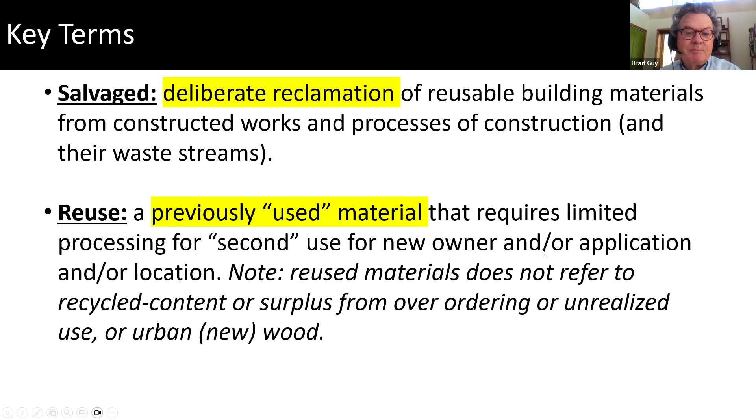Our project is for over 5 years, so we have plenty of time to work on a lot of the methodological and difficult, potentially decision-making issues that we have, although we have a good start on it.

Underpinning all of this is building the reuse capacity to serve the industry going forward. So after the end of the grant, we have capacity to provide environmental product declarations to the reuse industry, and I'll talk more about that.

The other three main parts are the tasks to create a product category rule for reclaimed building products, to develop nationally EPDs for reuse firms and NGOs around the US, and to create a digital EPD generator, and I'll again talk more about that.

You can see over the years we're trying to work in enough time to really be thoughtful about these processes and make sure there's good involvement, inputs, we work out the bugs and so on, and really take advantage of this opportunity to make this all well-grounded and well-founded for future success.

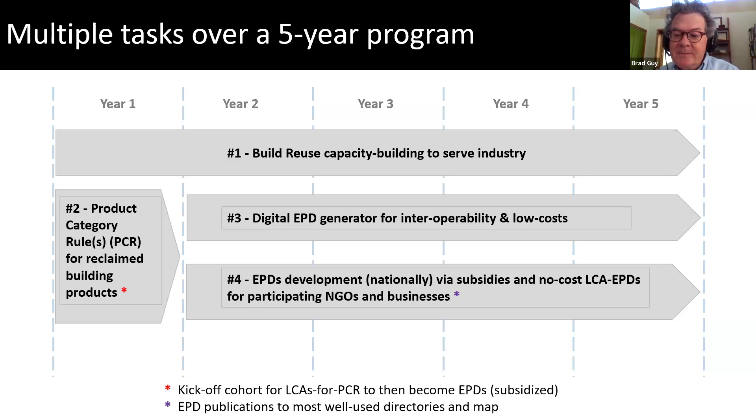I want to really highlight this industry. To this date, we've been able to track about 1,868 establishments. This is not including creative reuse, so-called art supplies and elements like that, or household goods or antique goods. This is actual building material reuse. It does not mean that one of these entities may not carry some of these other products, however, their primary focus is on building materials.

We're currently estimating about 20,000 jobs, 2.6 billion in annual revenues, and this is all generating $1 billion in wages. This is only 1.3 million tons of materials being diverted, which is less than 1% of the demolition debris generated in the United States annually. So I hope you can imagine there's a lot of room to grow.

The type 2 economic impact, meaning the actual full impacts throughout communities including the direct spend, the indirect spend, and the induced spending, is roughly at least 3.5 times. So annual revenues, almost $10 billion, $3.5 billion in local wages. So the real fundamental goal of this program is to grow these numbers.

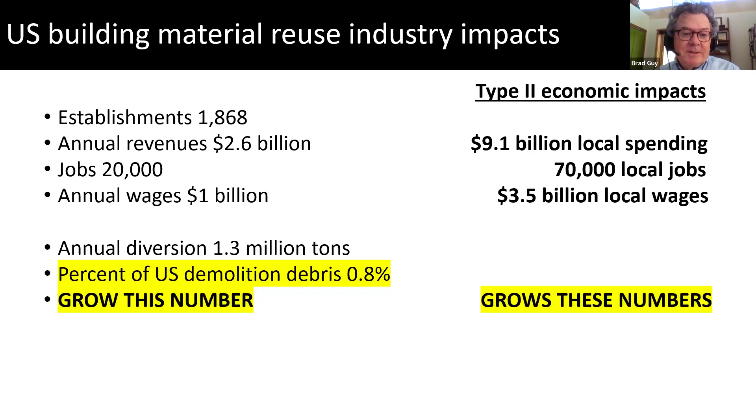Reuse establishments are in every state in the United States. Of course, they might tend or trend towards certain areas. There's a lot of interlocking factors that contribute to the success of deconstruction and reuse in the market. These can include policies, tipping fees, cost of labor, and the availability of land. These are all important factors.

For our project, we are looking at where reuse is happening and trying to be fundamentally representative of the regionality of reuse establishments. You can see the West Coast, it's kind of an obvious target. The Great Lakes, and there's a lot of that because of the historic nature of the US, the Southeast, Texas and Colorado, you can at least see for the moment where a lot of reuse is happening.

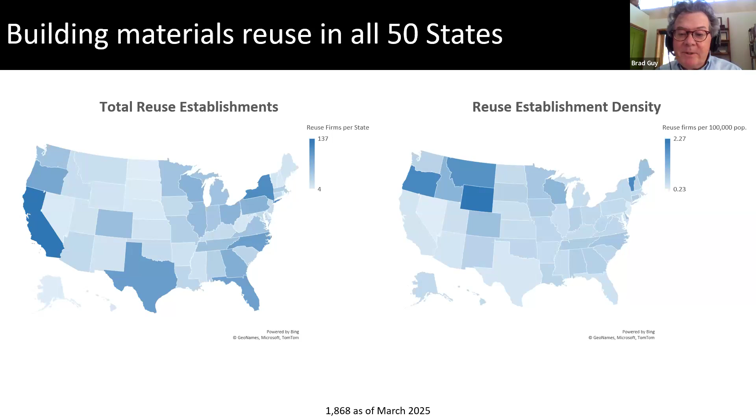Historically, the industry has been for-profit and nonprofit, almost 50-50, and that's really been, I would say, the grace of the industry is that it really cares. At the same time, the nonprofit sector is not known for being well-funded and supported, and it provides a lot to society without potentially being recognized and understood.

I've actually seen now that the for-profit sector is increasing in the industry. About 70% of all these entities deal in mixed materials, so the focus of our EPDs are proportionate to these sorts of material-specific divides around, say, mixed material facilities that might carry a variety of materials. About 25% of the industry is focused exclusively on reclaimed lumber, about 3% on reclaimed brick, and then you can see these smaller numbers, 1% in different sectors that are very, very niche.

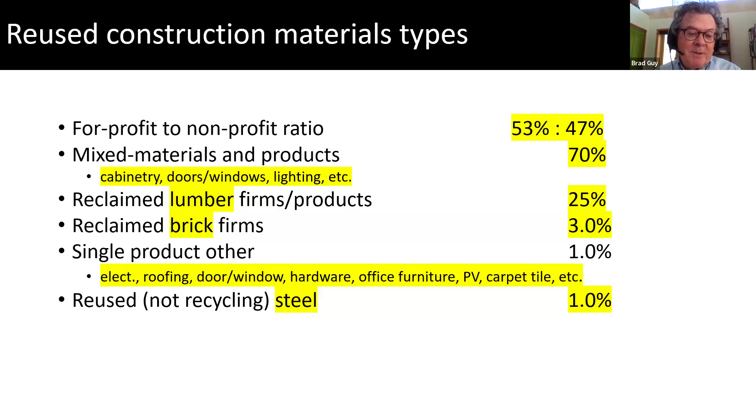For example, steel, there is a niche industry of reuse of steel. It's just not a large proportion of the industry. And to meet the goals of our project, we want to at least capture these appropriate material types.

So for those familiar, and I'm sorry to belabor this, but for others who are not as familiar, the bottom line of creating environmental product declarations and the underpinnings of this work is life cycle analysis. That is, as described here, to evaluate environmental burdens associated with products, and these can be goods and services.

So you could actually do a life cycle analysis of sending an email or a letter, if your goal is to transmit information. But we're more commonly focused on the production of goods. We are identifying and quantifying the inputs to these processes and the emissions released to the environment, and then characterizing the impacts of these processes in order to understand these burdens. This is extremely valuable for transparency, for decision-making, and for evaluating opportunities to make improvements.

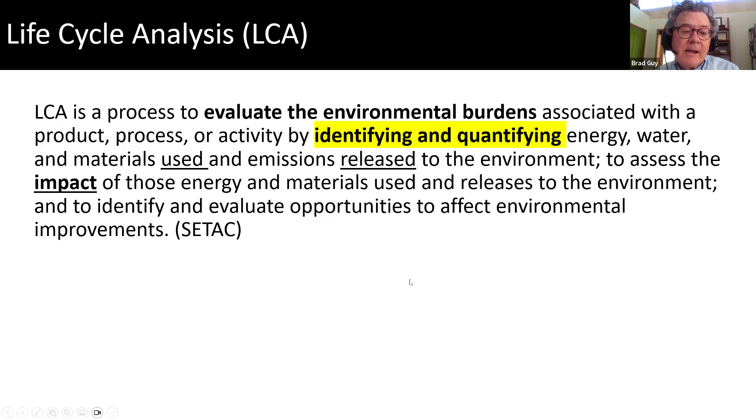So the way this is laid out in the life cycle of a product or building, in this case, is the stages of life, if we can use that term. In the production stage, this is module A. The construction or installation stage is the latter part of module A, A4 and A5.

The use phase is module B. So-called end of life, and we in the reuse industry hate that word, because this is not about end of life, this is extension of life. There's not an end of life for reuse. That's module C. And then module D describes the potential burdens and benefits beyond that product life cycle into the next product life cycle.

There are variations in life cycle assessment based on these modules, and the minimum core is modules A1 through 3. Part of that reason is that this is most under the control of the manufacturer or producer, so they have the ability to really be most certain about what they're characterizing. As you go further into construction and use, capturing and being able to control or understand that data gets more difficult, but there is a broad movement in the industry to expand beyond modules A1 through 3.

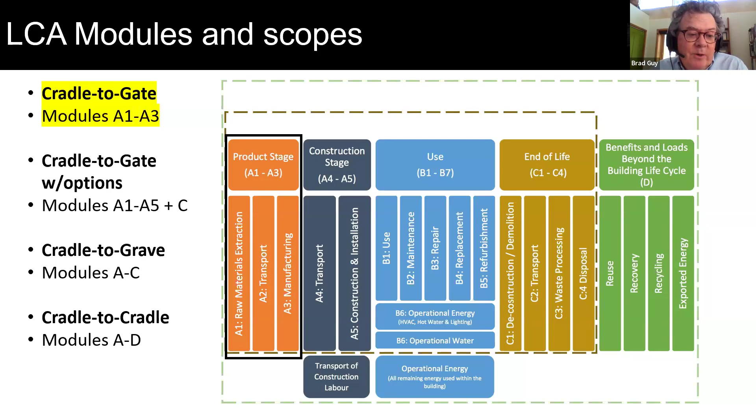So what is an environmental product declaration? It is not a thing unto itself. It is a summary of a life cycle assessment. It's a way to make the life cycle assessment understandable, communicable, and able to be understood eventually, and in some cases, comparable between them.

A life cycle analysis has a lot of detail. The idea of the environmental product declaration is to really parse that down into essential parameters that are standardized, and then also that this process is verified by a third party.

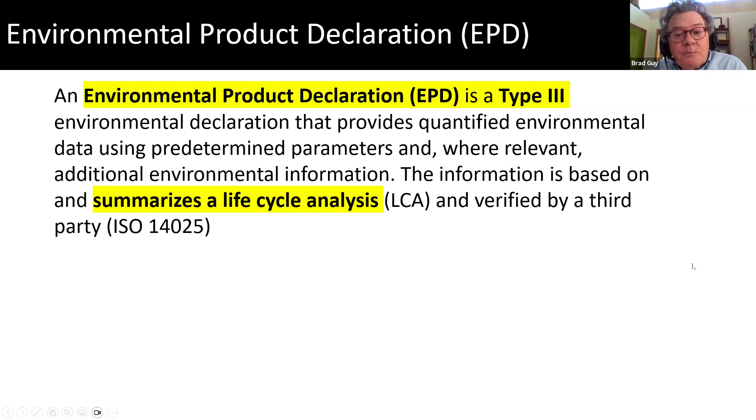And so what makes this different than maybe some other kinds of declarations you might be familiar with is it's third-party verified, it's based on an LCA, it's based on standards and guidance, it's quantified. So it's not, for example, like a type 2 environmental declaration, which can actually be self-declared, so that's the first big difference.

It can also be single attribute instead of multi-attribute, and it can be a claim, which as a claim or a labeling is not exactly or even at all clarifying the true impacts. It is simply a claim about some parameter or attribute, for example recycled content, which is great, and we want to know that, but it doesn't necessarily tell you the end results of that.

And then there are type 1 eco-labels, which have some similarities. They may be multi-criteria, they have third-party verification, but they are more of a pass-fail: you either have that label or declaration or you don't. For example, Forest Stewardship Council lumber uses a basis of criteria that may be a mixture of different attributes. It's not necessarily always the same kind of quantification; there are social attributes, for example, to Forest Stewardship certification.

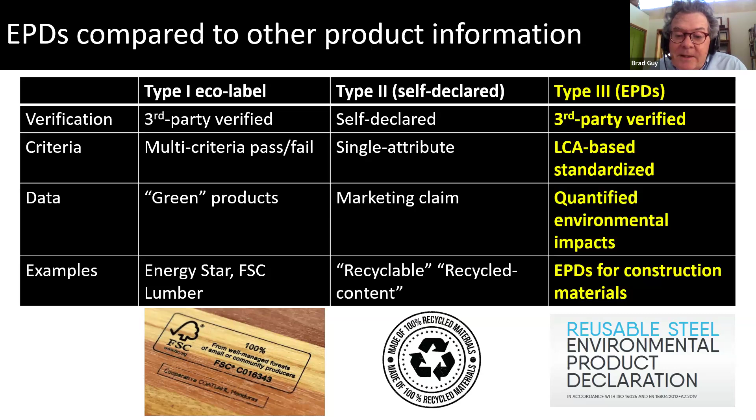For an environmental product declaration, it is similar in that way. So what is the serving size? That's what you're using in a building. The inventory is how much material it's actually taking to make that serving size, say a square foot of something. And then the standardized environmental impacts, which are consistent for EPDs globally.

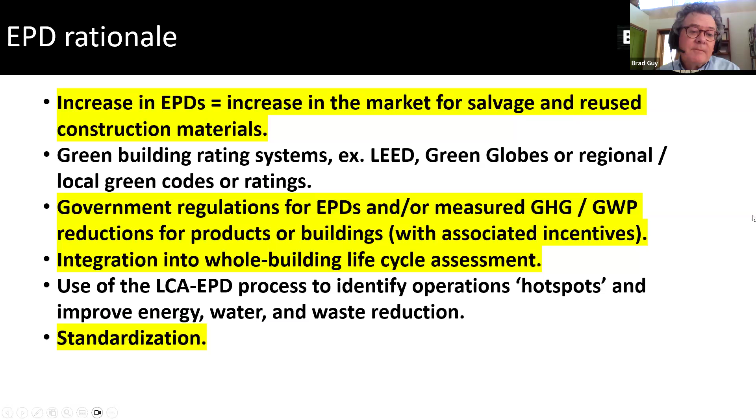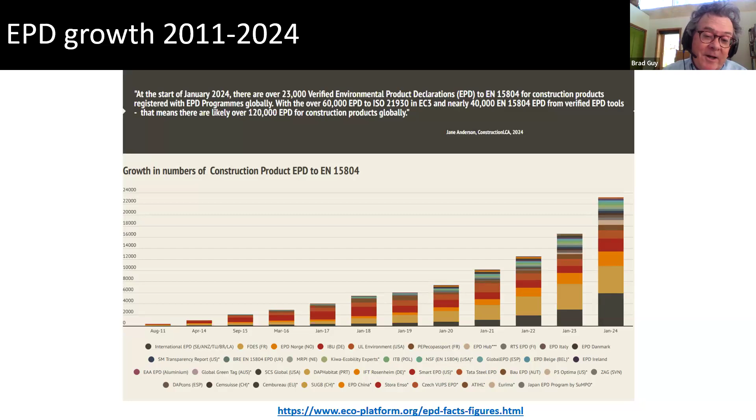I'm sure she's undercounting because she probably got exhausted trying to figure out how many there are. But this tells you this is a train that's on the track, and it's actually starting from zero not that long ago. It's picking up speed.

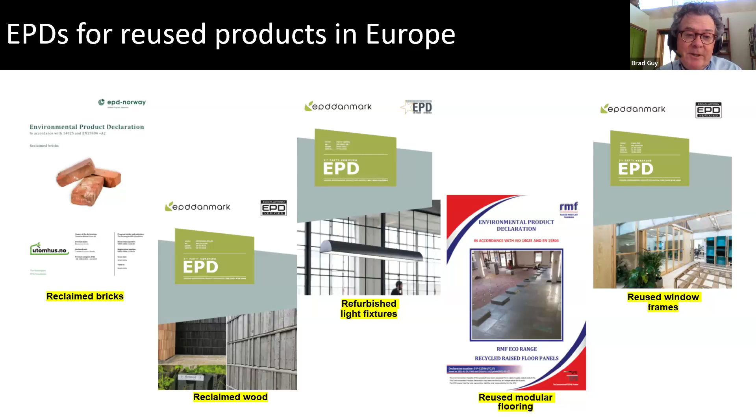There are EPDs in Europe for reclaimed products, so I spent a lot of time looking for them. There's not a lot, but at least to convey to you, there are precedents for EPDs for reclaimed building materials. They are not in the United States, so that's what we're trying to do, is make this happen in the US.

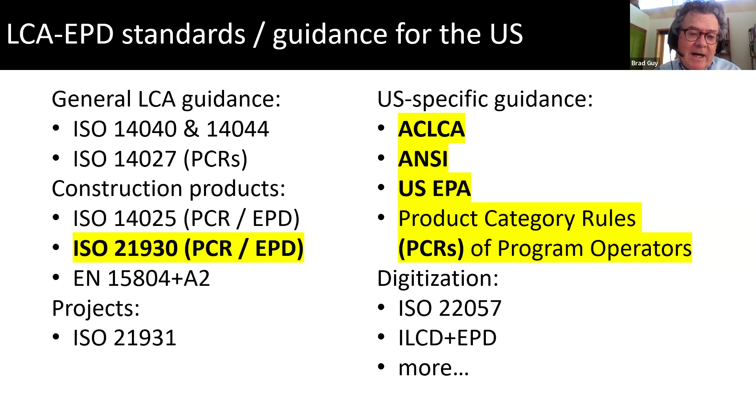There's a lot of standards and guidance, so I'm just highlighting here the growth of the capacity of guidance and standards in the United States, because Europe has been doing this for a while. We have the American Center for Life Cycle Assessment. We have ANSI standards, which have been around. We've had EPA, which has most recently produced a lot of guidance. We have product category rules of individual program operators. And so we are joining this chorus, and we're trying to make the voice loud in the United States.

LCAs and EPDs thus far really have been primarily for new products and understanding recycled content as an input to new products. What we're talking about is actually very different in its way. We're not producing new products, and it's not even recycled content. It is taking an existing product and continuing its life.

Our intentions and the way we've designed this project are to develop a new core, or Part A PCR, for salvaged and reused products for use by the industry. And this is another 3 hours of discussion and more to talk about that.

However, using that, we can start creating EPDs in a certain way, which is called declared units for salvaged and reused products. To go further into what are called functional units, we are going to have to create what are called complementary, or Part B, PCRs.

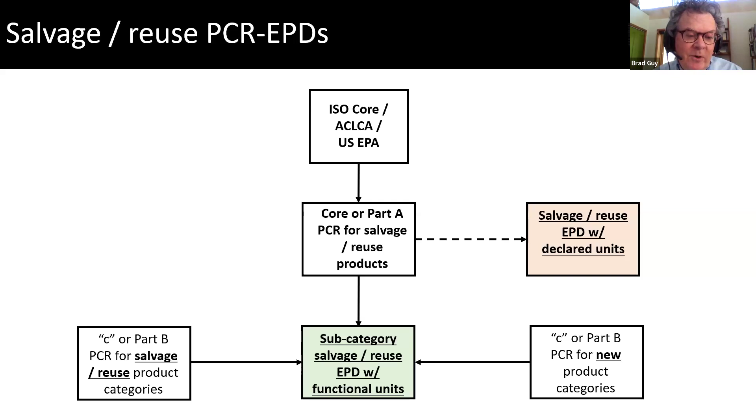The core PCR that we're going to create can work with Part B PCRs of existing new products, or the existing PCRs for new products in the equivalent categories. So we have a way to work with the existing Part B PCRs and work within the systems of new products. And we can develop additional Part B specifically if it turns out to be the case for salvage reuse product categories.

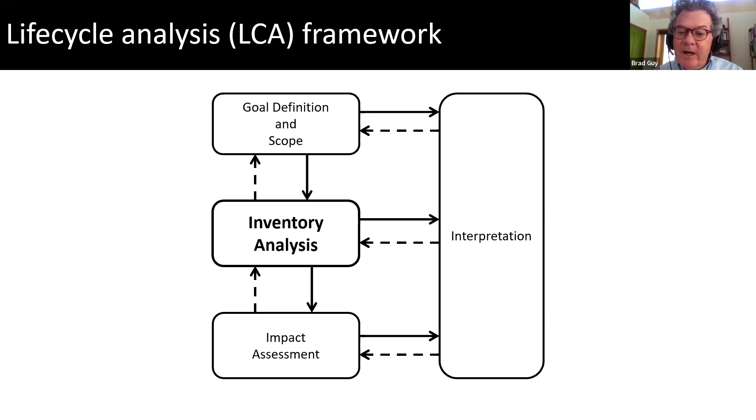What we're going to do is subsidize and provide technical services to facilities throughout the United States to generate their life cycle inventory data that we can then use to create LCAs and EPDs for the industry, and again build this up over time. We have a 5-year program to do this, and beyond the grant program.

This is my favorite diagram. It's not quite this simple, but it's almost close. A unit process creates something, and most products are a collection of unit processes. It's almost as simple: you are taking the inputs and you are quantifying the outputs.

I think it's useful to even think of this in terms of expenses and revenue. So it's expenses to the environment and it's your actual expenses. The revenue, quote unquote, are the things you're producing and the things you're getting value from. I hope generally people would say, sure, we should minimize our expenses and maximize our revenues of any type. But this really kind of describes the inventory process and the real meat of doing a life cycle analysis.

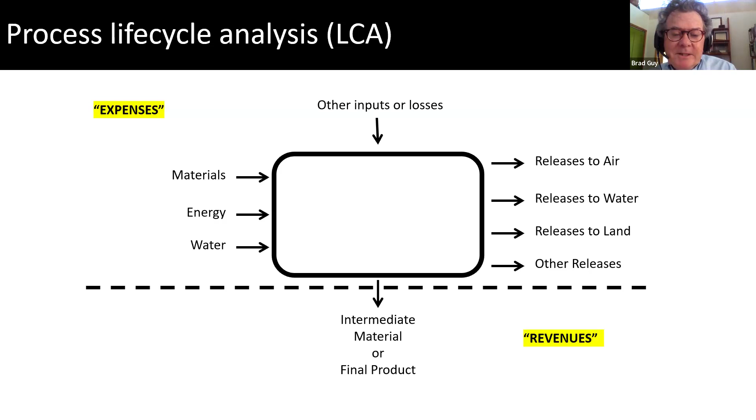For the salvage industry, there's obviously many ways to obtain materials. So I'm just trying to show simply: salvage, deconstruction, and so on are one means to obtain reclaimed material. There are inputs of energy, materials, water, production of waste in doing that. That is the equivalent of an A1 for a new product.

You might then transport that reuse, do some processing on that site, transport that reuse product to the reuse facility, and do additional processing. Those are modules A2 and A3 in a life cycle system.

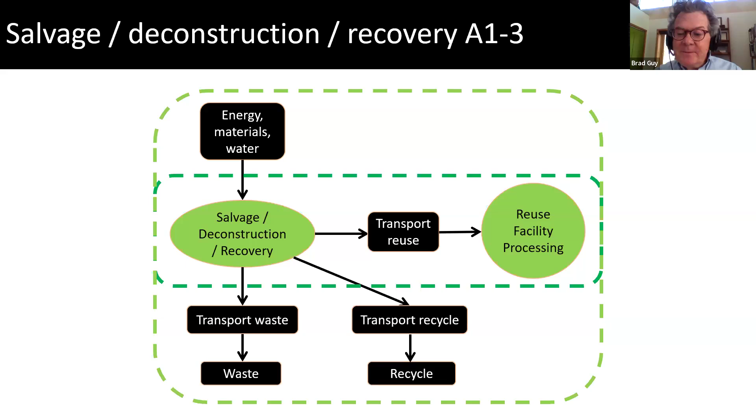If it's the case that the products come from other sources, or in fact we find out that the deconstruction may be a small impact relative to other impacts like transportation, then I'm sort of cutting off that first part and showing that if it was the case that simply materials are transported, so the cutoff is that point of origin, they go to a reuse facility, we will again have energy, materials, water, production of waste. You can have byproducts that are recycled if that's the case. So this is A3, the same A3, but given different sources of materials.

Transport, that's the A4, so to a site of use or installation. And A5, which would actually be that construction phase. Again, this is a product, it's a continuance of a product, and it also then has the second life cycle. So module C, which is the end of life, quote unquote, process.

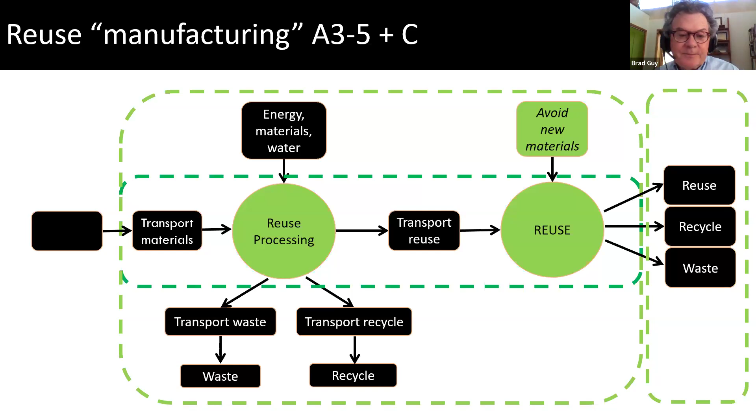About a third of our effort is on a digital EPD generator. As everything has evolved from paper to AI, we can take a very long leap there. We absolutely want to and need to be in line with these advances.

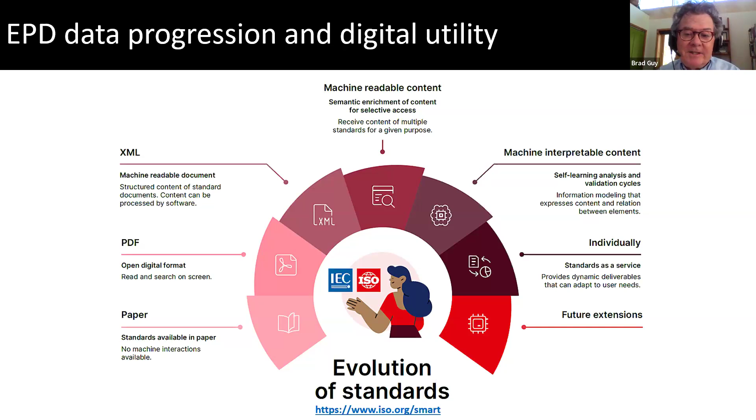So EPDs in the beginning would be a paper document, a PDF. There's very little readability, very little interoperability in those, but now we have digital EPDs, and that's what's needed. So if they're going to interact with digital drawing tools, digital software modeling tools, the ability to make changes, all of this is absolutely essential. We have all intention to maintain and be in line with the advances happening throughout the industry.

The last thing I'll wrap up with is we do know something about the use of reclaimed material and where EPDs might be most beneficial. But it's important to be open to the markets and the opportunities. A few data points are from old historic LEED projects. Wood has been well used in commercial applications. And then you can see finishes and openings as three product categories that have some utility potentially.

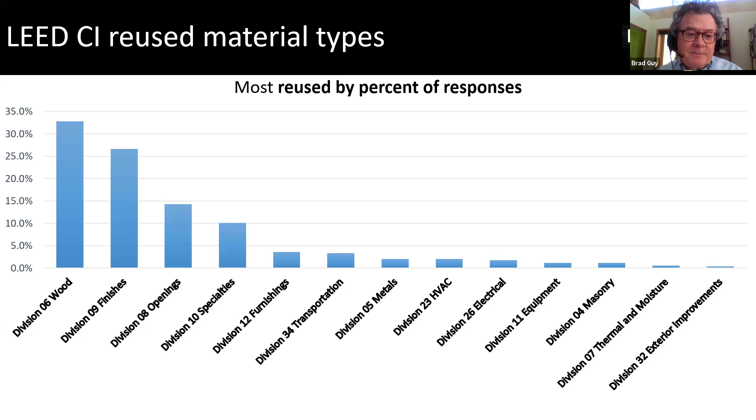Literally 30 years ago, Portland Metro, the regional government, did a whole feasibility study of commercial material reuse. So for example, on the flip side, the 10 most commonly salvaged commercial products - wood stands out again, there's a little different order where specialties is a little lower on the list, but doors, windows, storefront, masonry, cabinetry, electrical. The good news for us is these align pretty well to what the existing industry is actually reclaiming and making available.

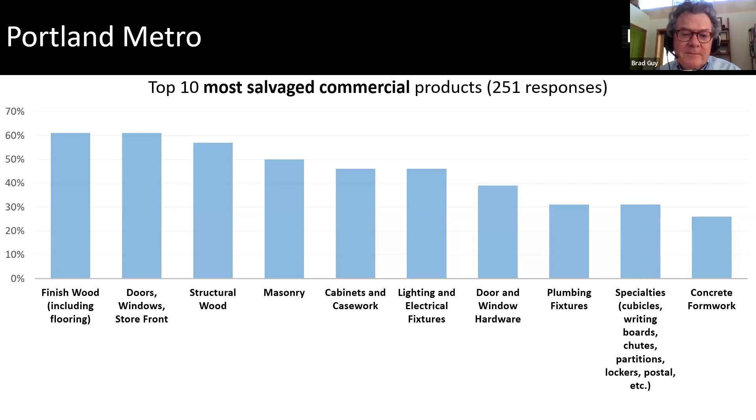I have to mention LEED v5, which I believe is currently being balloted for approval. In the salvage material or reuse material credit, there are targeted so-called product categories - these are categories given a larger weight. So thinking about alignment and being as sensitive as possible to where we're going to actually serve the market and the reuse industry, and being able to provide those materials to the market for the benefits you may achieve - whether you're a green consumer, a LEED project, a government entity, we want to serve all of those.

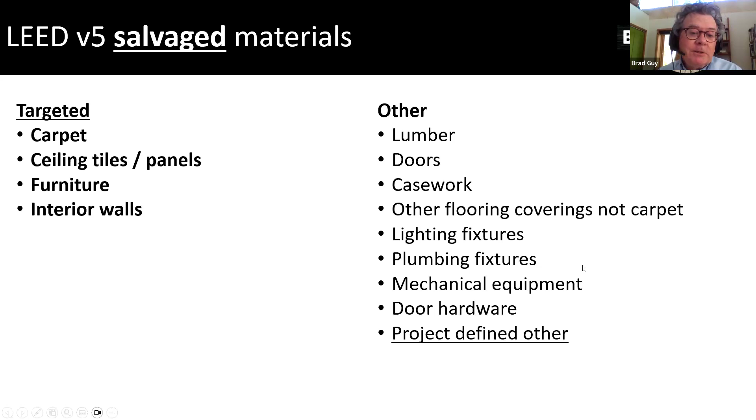And this is it - there's my email, and the general email as Melissa mentioned. I have a few leading questions here to let you know we are doing PCR development. We are actively seeking facilities for facility-specific EPDs, and always love to hear what people think about where an EPD could have the most benefit in terms of salvage and reuse product categories. So I'll turn it back over to Melissa.

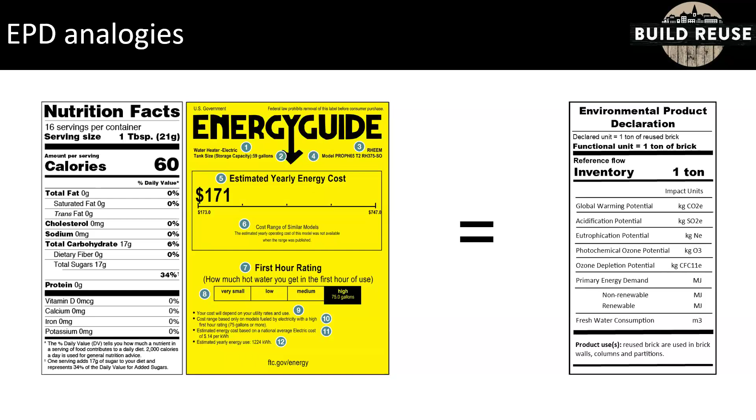Well, I will add cabinets as well, because those are three categories where you can have a wide range of materials in those product categories. As far as creating the EPDs, they would have to be categorized similarly. So wood windows are wood products, and as well, then you have aluminum window or steel window.

There's a lot of cabinetry that's made from MDF and others, and a lot of countertop materials that are different. But historically, the older materials are mostly solid lumber, and like anything, you can start having different variations. I would just say the point is we do have to abide by the material ingredients in each category. But wood cabinetry, solid wood or solid wood door is a clear category for us and a lot of products.

Thank you. There's continued chat about steel specifically, not necessarily questions, but that some of the steel is from reconditioned or decommissioned oil rigs and so on.

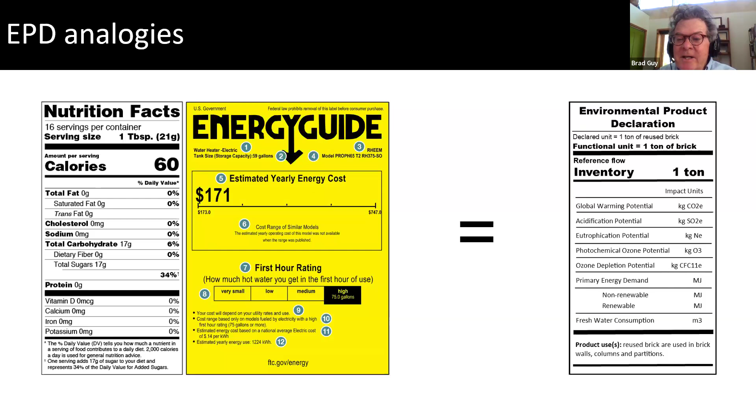My favorite current policy is the state of New Jersey, which has a tax incentive for companies who produce EPDs, and also a public procurement policy for a bid credit. They'll actually give you, for example, a 5% bid credit, or you could call it debit, off the top of your bid for providing products with EPDs. So those are direct financial incentives to provide EPD products. The quantity, quality, yes, it's a thing.

Oh boy, we're going to run out of time, but anyway, yeah, it's a thing - quality and warranties. Warranties are not common as is. However, back to lumber, we just sat in on a webinar from, I'm sorry to blank on her name, from the city of Eugene, Oregon. They're working on structural lumber in the International Building Code. Oregon and the state of Washington both have a default lumber grade for lumber within those states for residential use. You can regrade lumber. So I've actually done visual grading, which is the traditional method of any kind of grading on reclaimed lumber, with Forest Products Lab. You can do structural testing, you can do destructive testing. There are now methods of sort of x-rays and CAT scans. That's a little intense, but you could actually run a piece of lumber through a CAT scan and look at the density of the lumber.